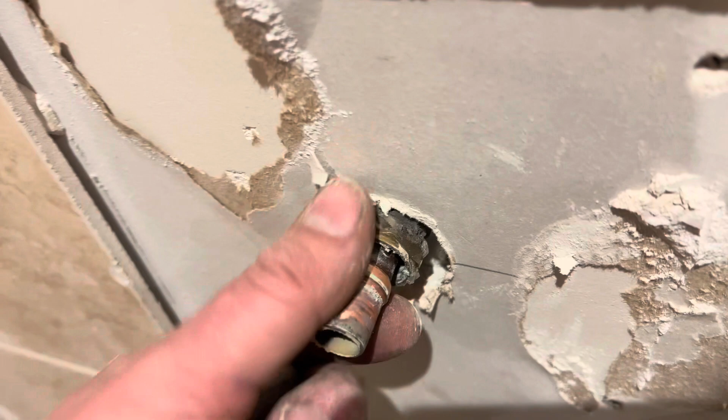So the weatherboarding is going to go on, and it's going to bring it out probably 15 mil, which means these pipe tails aren't going to be long enough. And this technique here is a nut and olive that goes onto the 3/4 thread. So what I'm going to do is, I'm going to use a very old-fashioned tool now. I'm going to cut it, remove the olive, cut it and clean it, and I'm going to use a swaging tool so I can just about get it on.

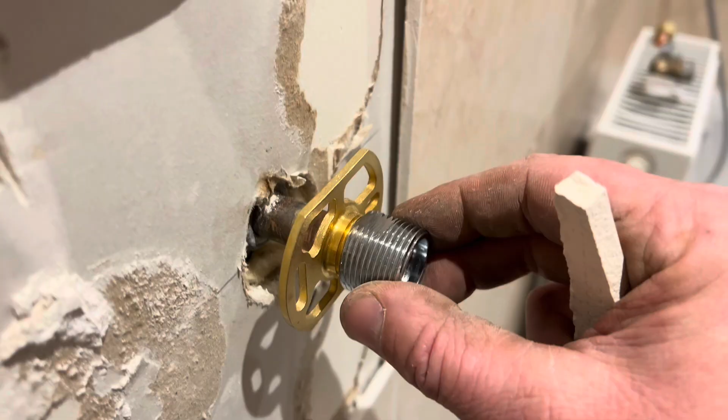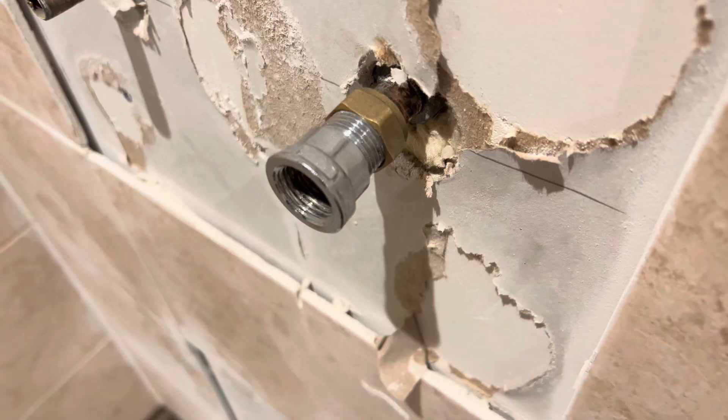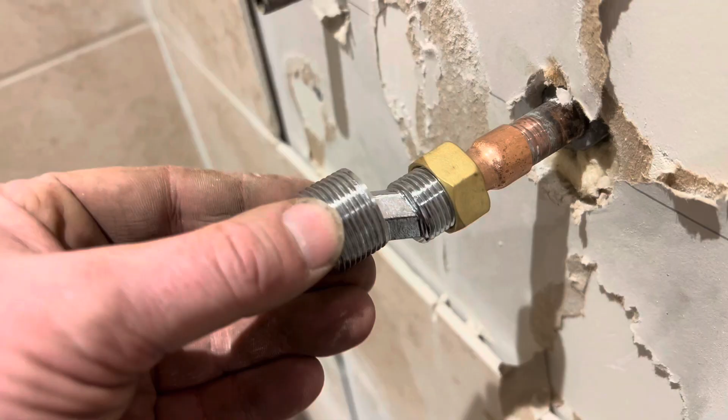The next method is this technique. Now I like these because you can screw it in the board. However, the pipe is too short. First option, male iron, make a PTFE grommet and screw that in there. That's one option. Another option, solder a tap connector on and use this type of connection technique.

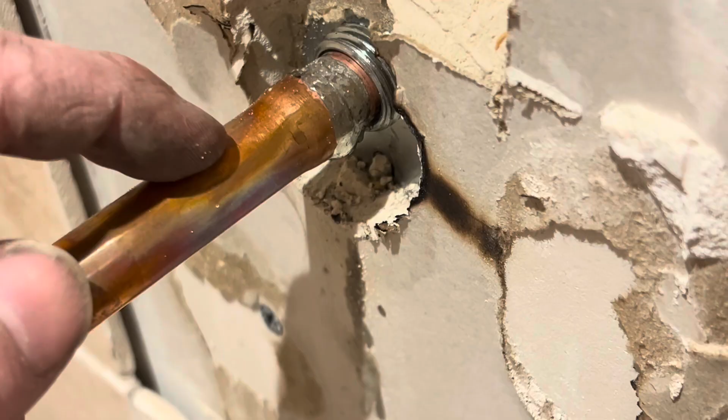So this is a swaging tool, and you use this instead of using a coupling. Here we go. There you go, one coupling. So only soldered one side. If there's an ordinary coupling, conventional coupling, you'd be out to there. So that gives us room. All up to here. Job's a good one.

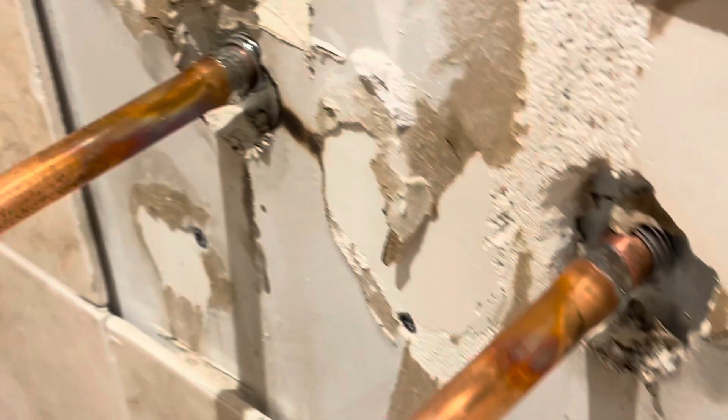So this is the state of the pipework that is behind the tiled wall. You had a mixture of Speedfit pipe, different makes, different brands, had the wrong inserts in. Some of the inserts were missing. Some of the components inside were in the wrong order, and well, that had been leaking for some time. So as a conscientious person, I decided to do the whole lot in copper, and it's delayed the job. And I've explained to the customer the reason behind my actions, and they've agreed to go forward.

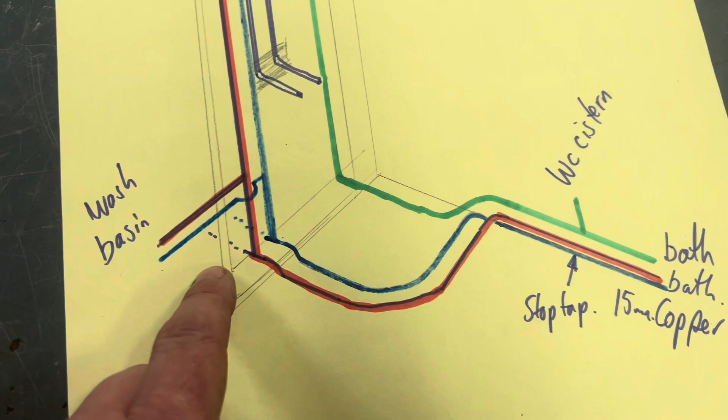Mains will come in, you'll feed next door, feed the basin, and then go to the unvented cylinder. The hot to the basin and to the bath. The shower now will have its own supply. So if the shower ever becomes faulty, it can be isolated in the loft space.

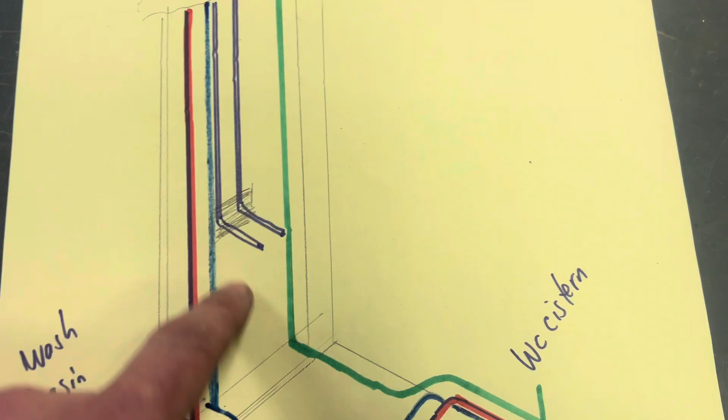The balanced cold supply, which comes from the pressure reducing valve on the unvented cylinder, will come down, feed the WC and the bath. So the reason why I've decided to keep that, if they ever have a bath shower mixer, it will work. And then the balanced cold supply will also supply the cold to the shower.

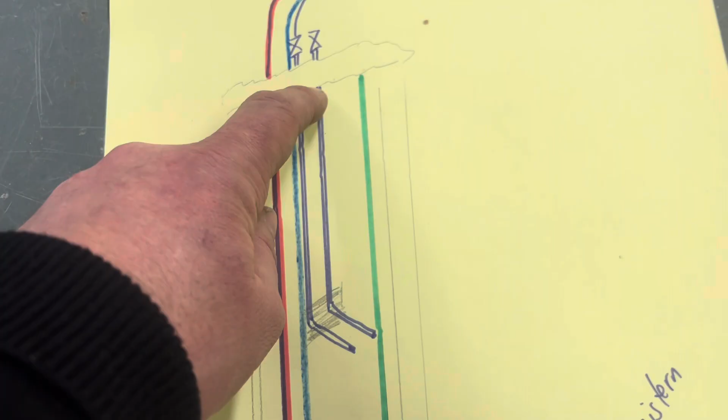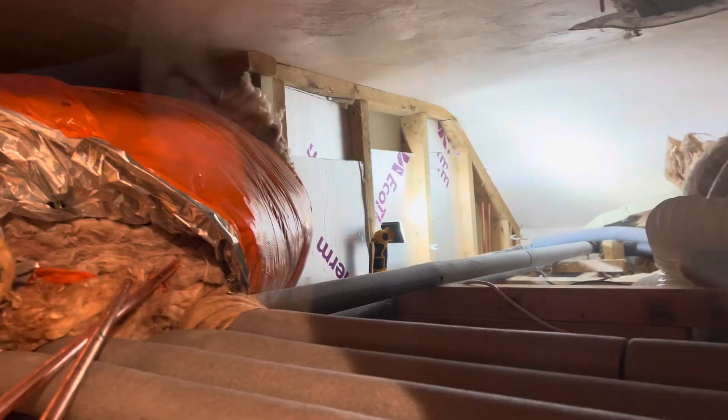The joys of being a plumber, going in a tight loft space. Right, so the pipework in the void, stud wall, was all plastic and leaking, so I've rerouted the pipework here. There you go. So it comes up, all the copper is now accessible, the shower has its own supply. So now I'm going to turn the water onto the shower. Hopefully there's no leaks. There you go. Oh God, heaven. Job done well and durable.

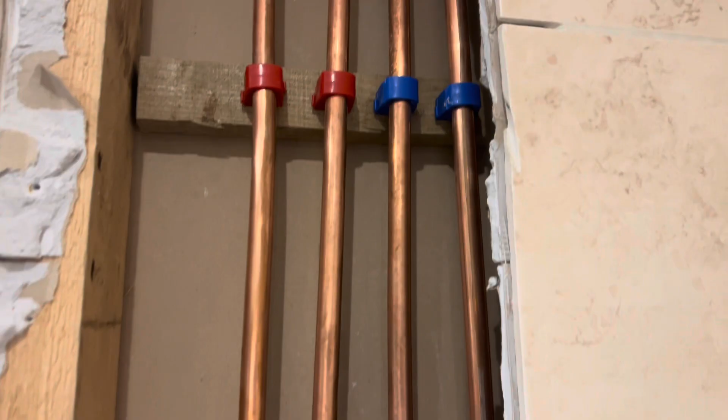So it's all been routed down. Shower's first fixed. It's on bends and it's on its own supply in the loft space, so no issues there. Nice shower plate just to hold it in place. Supply comes down. Look how neat this is.

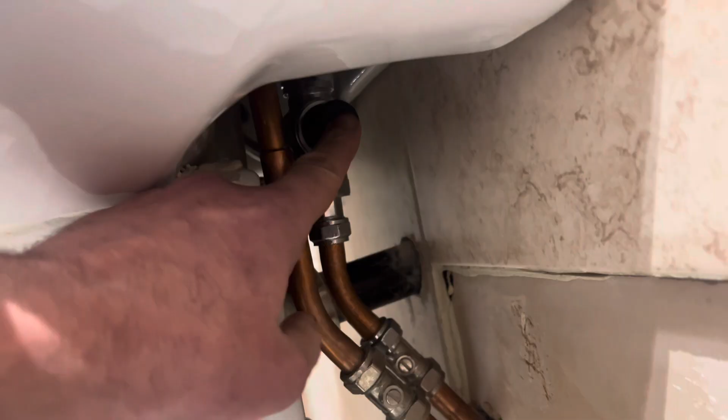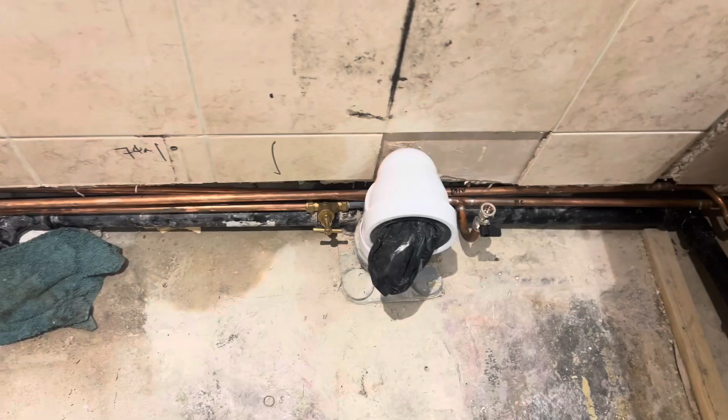Thermostatic mixing valve facing you, so you can get to it, you can adjust it. Again, it's got the single check valves on, cold water's category 1, hot water's category 2, isolation valves. Again, one on the bath, isolation valves on as well. Isolation valve for the toilet.

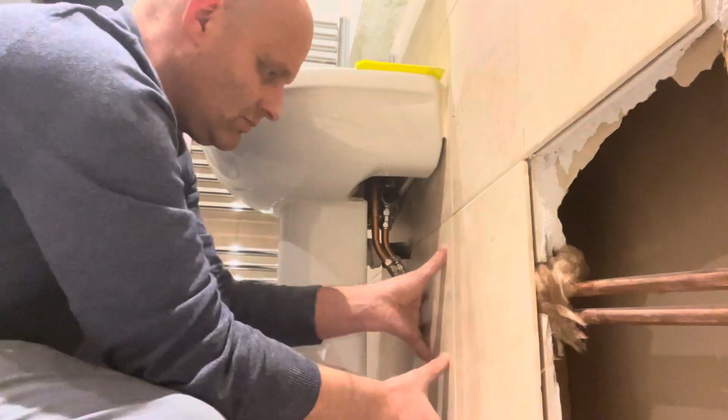So now what I'm going to do is just add some strength to this. I'm going to put some insulation there just for the noise issue, because obviously someone turns a tap while you're having a shower. I don't want the vibration or anything like that, so I'm going to insulate that. I'm going to put some wood across here so that when they have a shower, the rail, if it takes some abuse, is going to have a good wood fixing.

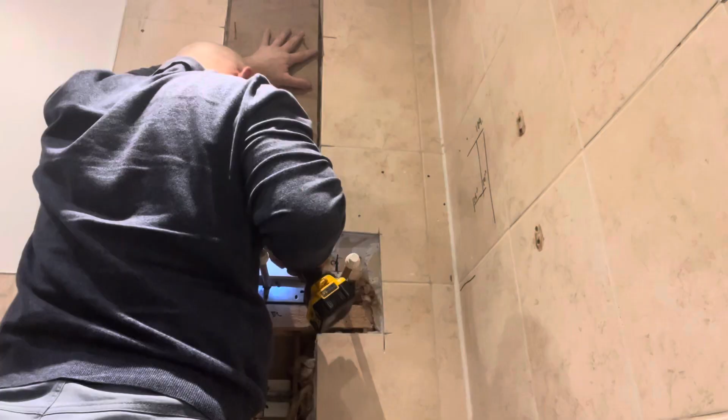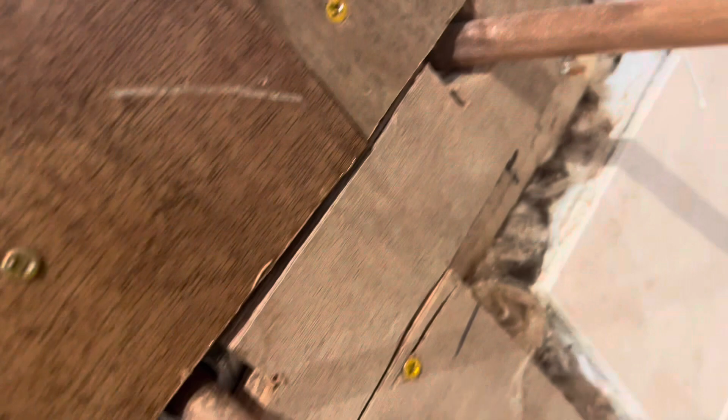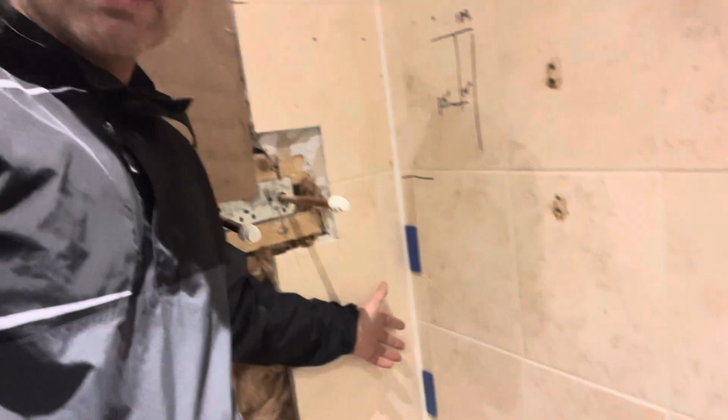Now, the wall is so far out, it bows. These are cottages probably 200 years old. So what I've done here is put some wedges in, some gap fillers, what window fitters use. When it comes to bathroom suites, they don't have the quality that was there, say, 20 years ago. So you've got to do extra actions just as a precaution, really.

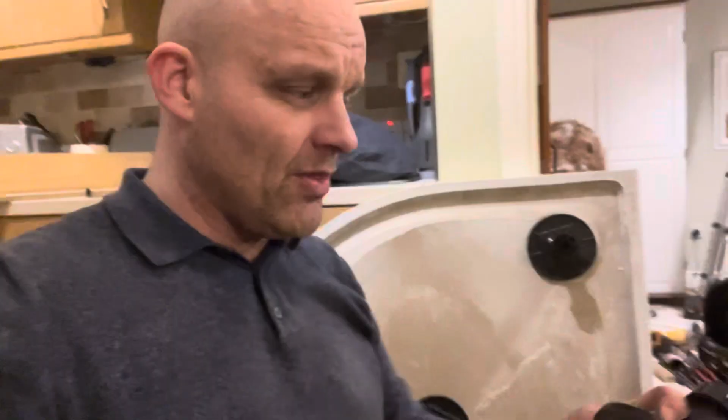So this tray is actually really good quality. It's resin, it's stone, but the feet are supposed to stick on it. So, day before, I'm going to glue the feet on.

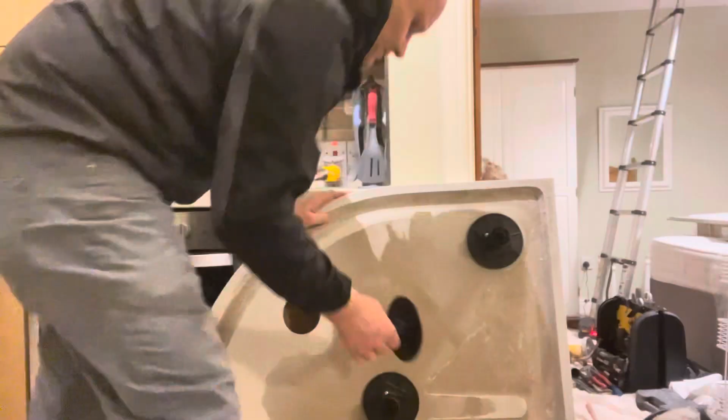The weatherboarding is cut to the correct length. Now I've got to drill the holes to first fix it through. But for durability, the lifespan of a bathroom suite should be about 15 years. I want to get a bathroom suite to last about 20, 25 years. And this is a perfect bathroom suite. If you look, the walls are half painted, so you can spice it up after a while.

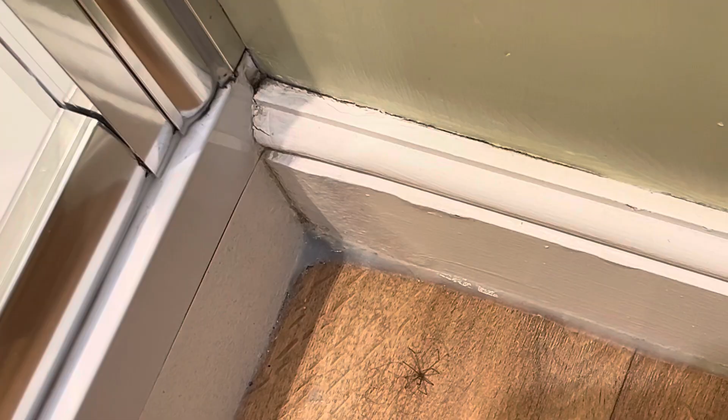For the weatherboarding, I'm going to go past the tray, so if the screen ever leaks, it won't destroy the tiles or the architrave or the skirting. And I'm going to show you an example now in the ensuite next door. So this shower surround, the screen and the weatherboarding is a perfect job. Very neat finish, very, very professional. But if you look here, they fitted the weatherboarding to the edge of the tray and it's leaked. It's got damp, and look at the skirting, it's rotting.

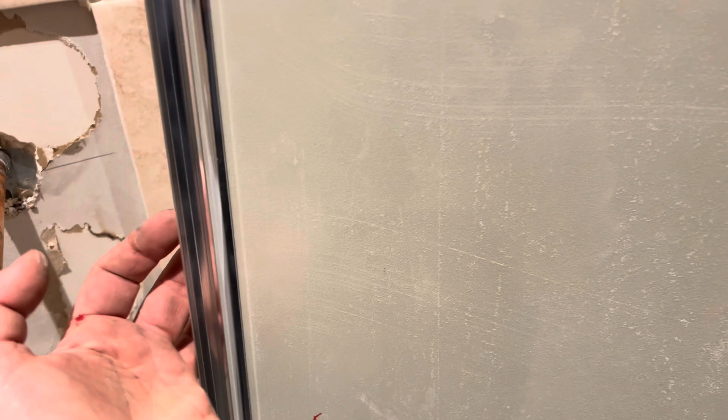So, I've marked it out from the edge of here, which represents the wall, from ceiling down. I'm going to do 2 pilot holes before I do the main holes.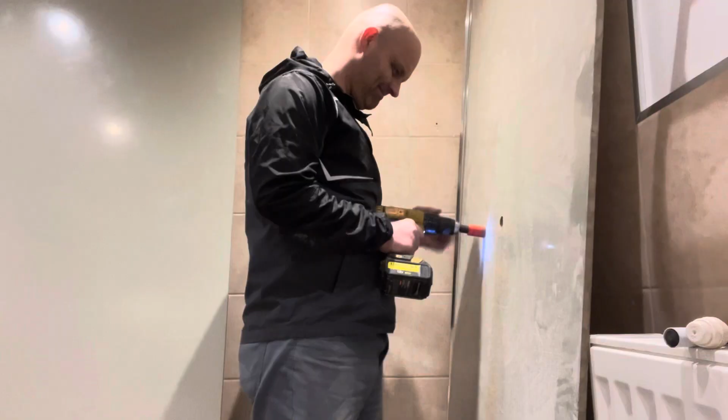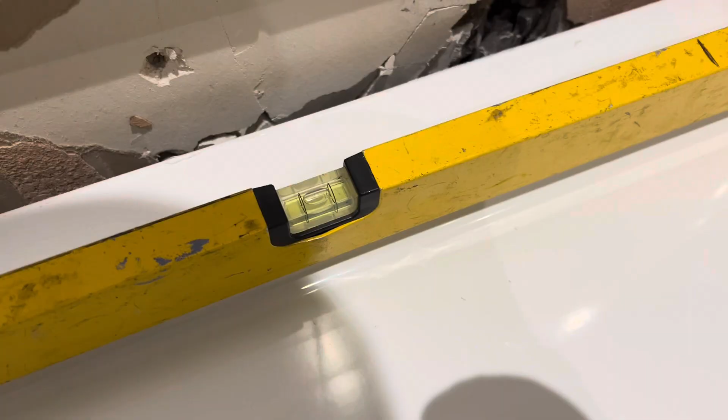Fingers crossed there's no issues here. Spot on level. Spot on level. So this method of doing the boards isn't the right way because it's more time consuming, but with my anxiety, and when you consider the fact that if I made a mess of this board, it's profit gone, isn't it? And not good for my blood pressure. So this is the method that I use.

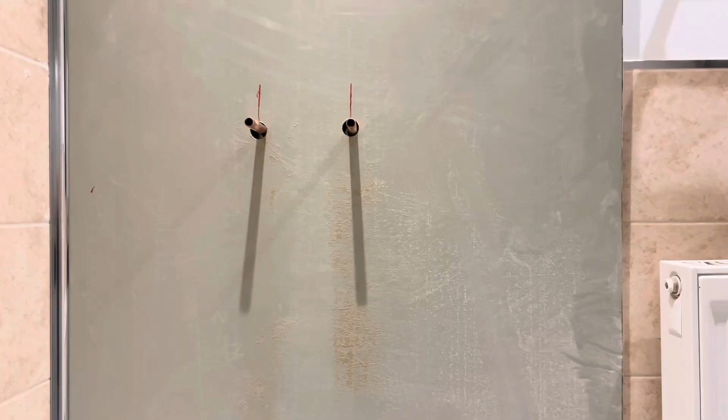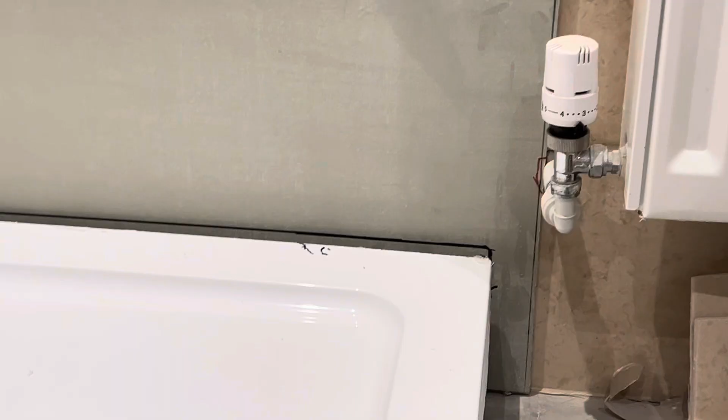The board's in, first fixed, the tray's in at the correct level, but now what I do is I mark it out along the side as well. So I'm going to pull the tray out, mitre it, push the tray back.

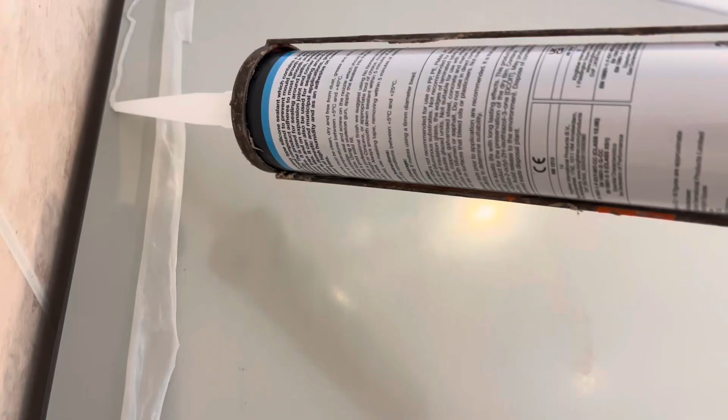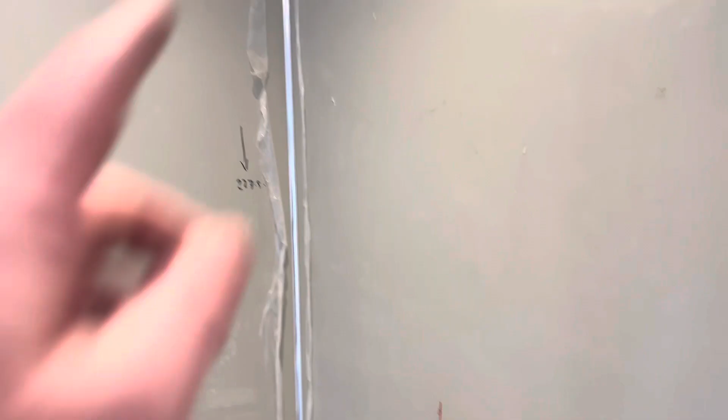It goes past the old tiles, the strip's siliconed in. That's level, glued. Goes down past there, look.

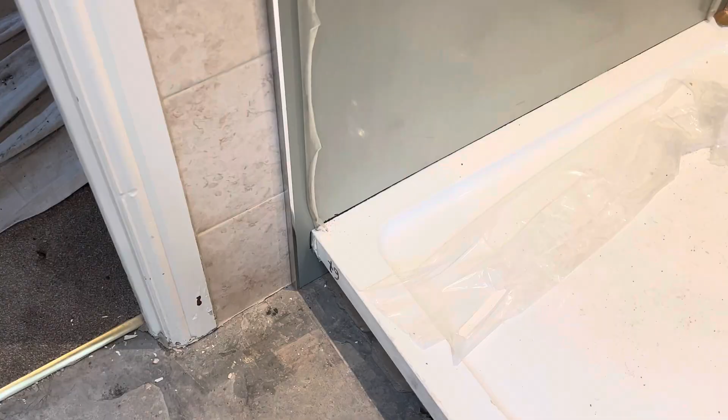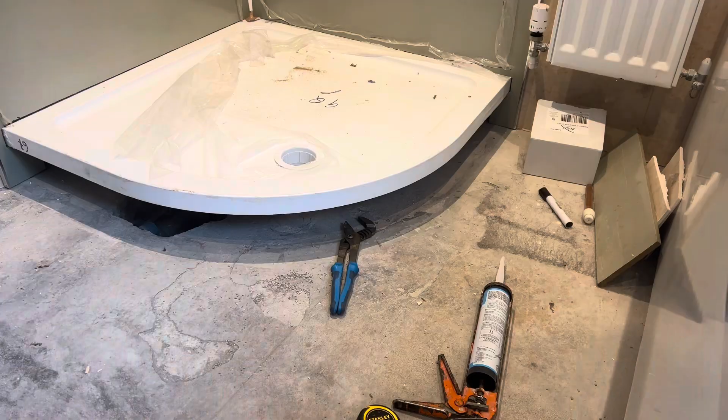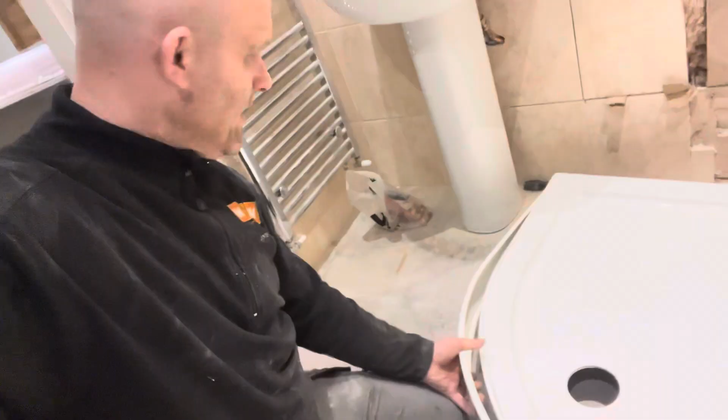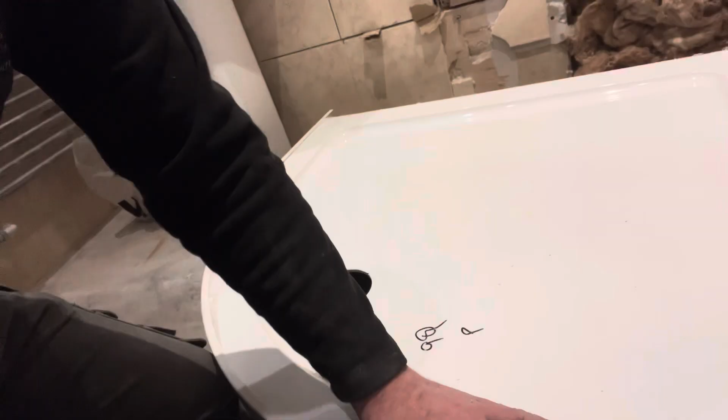So a simple tip now, how to do the plinth for the shower tray. Get the plinth, put it on the tray, out of position, like so. So that's where the tray plinth will be. Mark it off there and there. Dead simple, isn't it?

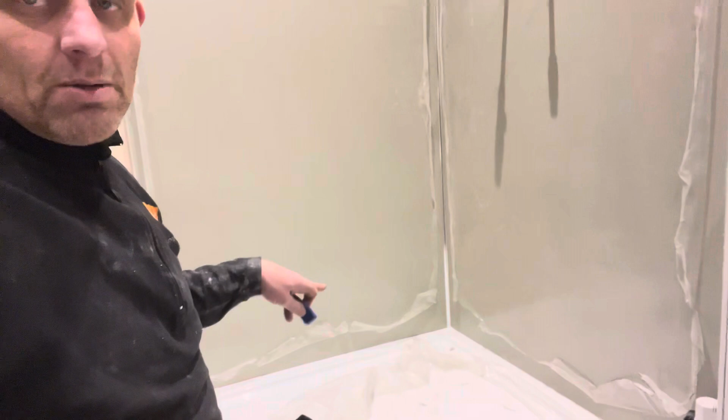So I'm now going to put silicone between the wetwall boarding and the tray. I'm going to let it dry, and then I'm going to fit the shower screen and the shower panels going up, channel going up. And I use this. This is really good. It's just for spreading silicone, and it just keeps it clean and neat. And as you're actually using this, it actually pushes it into the sealing zone. So here we go.

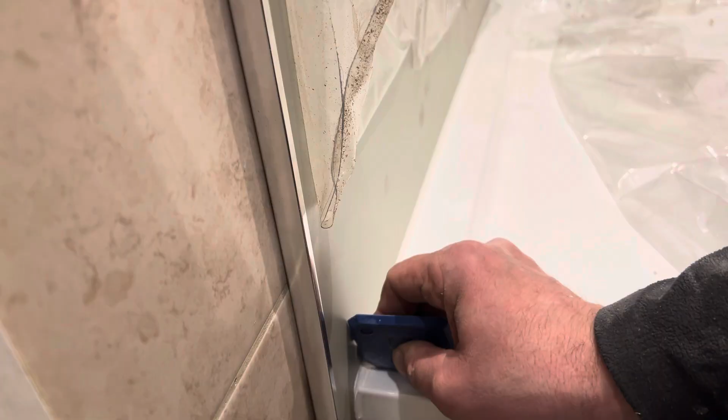So now I'm going to start fitting the actual shower screen. I've done that for easy access. Happy with that. Now the shower screen. So for the shower screen assembly, there's a method to doing these. Everything's in line. All the components and spares are ready. I've got the instructions.

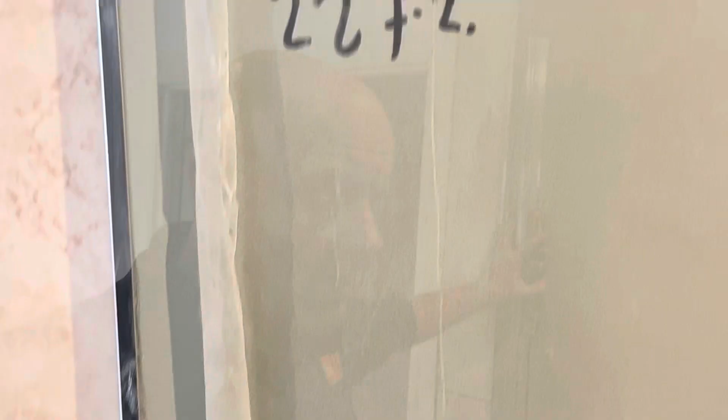So first thing, mark a centimetre from the edge and draw the channel line. So most DIYers and plumbers make the error by gluing and siliconing the shower channel to the wall. You don't do that. You do not do that. If you do that, you'll never get it out for maintenance purposes.

The caretaker, the manager of this hotel, if there's a problem here, he's got to take this shower panel out quickly while the residents go out for lunch or go hiking. So you don't glue them back, you don't silicone them back. Another point is, the seal goes on the outside. Goes there, up the wall. If water gets in this channel, it will leak.

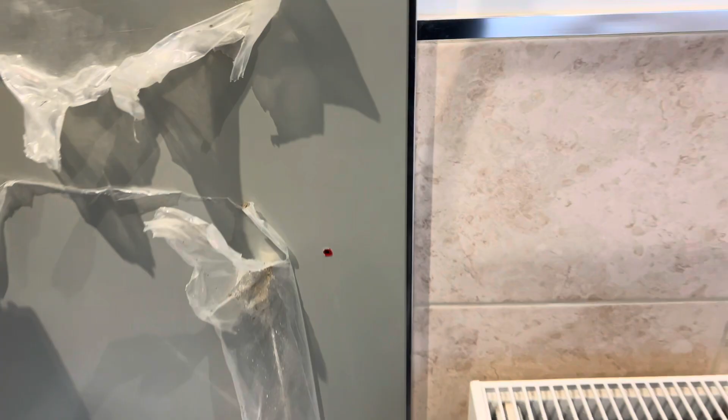So next few hints, always have wipes when you're applying silicone. It's really good. Whenever you're drilling through tiles, take the hammer off, or use a proper masonry drill bit. So what I'm going to do here is silicone around the hole just to make it watertight. Never use your drill driver on them. These can be quite complicated. Make sure you always put the seals in the right place. It's all done.

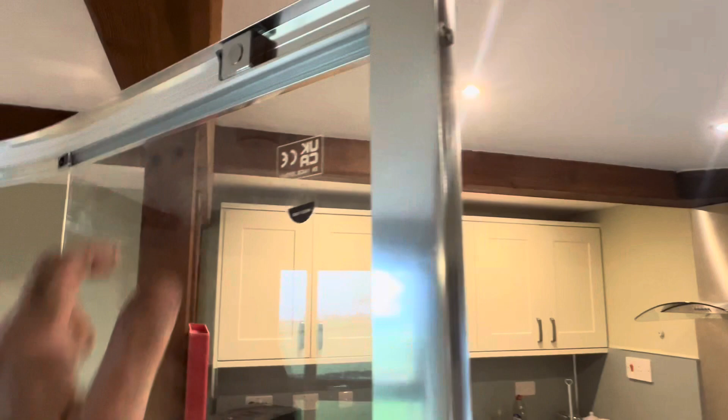Don't bother sealing this side of the screen, and don't bother sealing here. If you seal there, it'll get damp. So you just seal the outside of the channel and outside around the shower screen. You do that so if any water gets inside the shower screen, the channels or the screen, it can drain out.

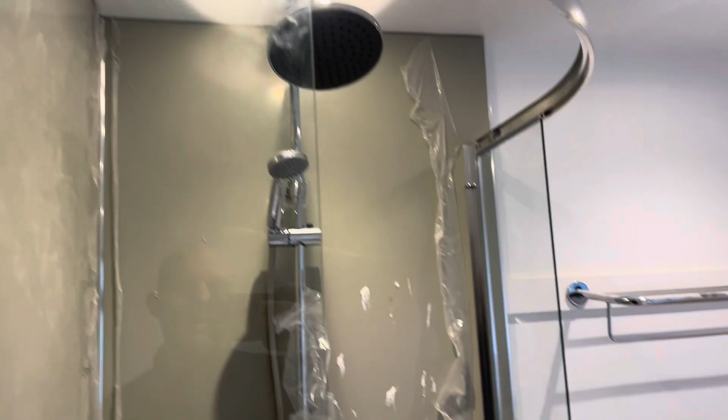Shower screen's in! You might need assistance with these screens because it is heavy.

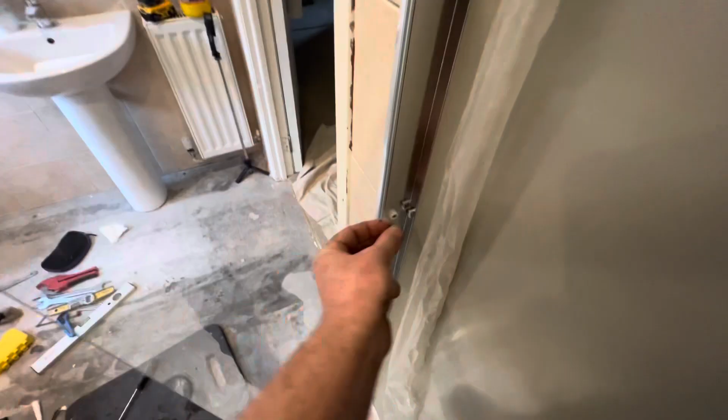The wheel release goes at the bottom.

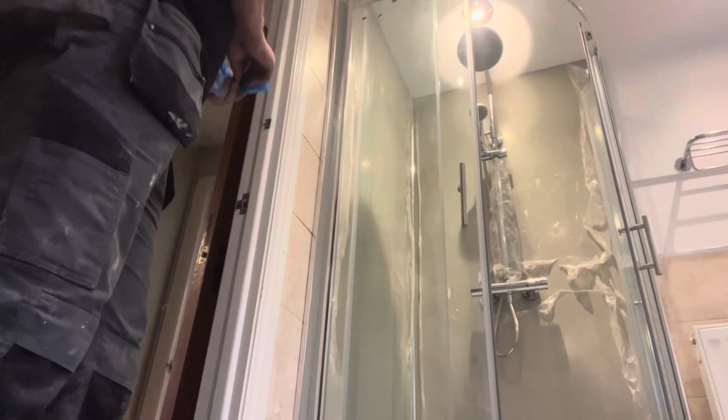So just to finish on another tip, after you've installed this, there might be a little bit of movement, you know, silicone might shrink, or if you rested it on wood and cement, that could dry and shrink. And the frames can sometimes move, and the doors are quite heavy. So the trick for these to stay closing properly is to adjust the door hinges.

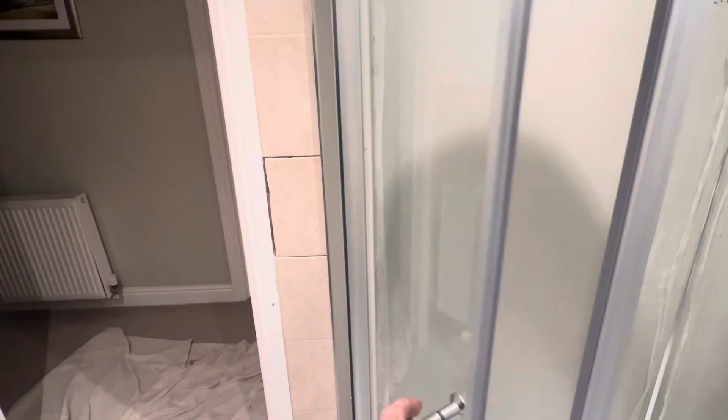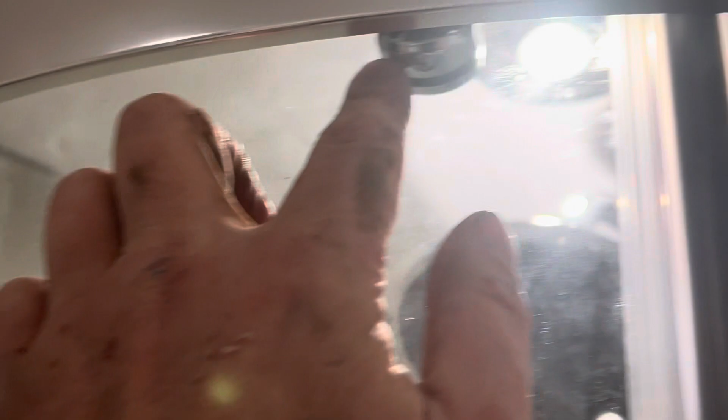So you close the door. On the hinge, there's always this screw. That will adjust the door for you.

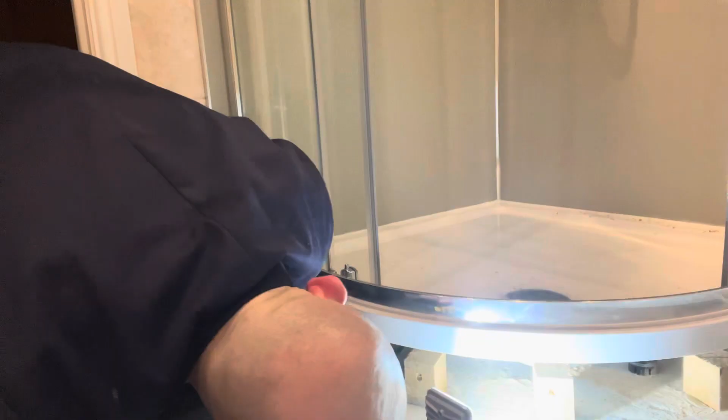I'm singing in the rain, singing in the rain, what a glory.

Something completely different now, so he's bought 2 toilets to install, and this is what he's done, very wise. These are the components that came with the toilet. Look how cheap that is, cheap plastic thread, and the siphon is really poor quality. So this is the wise decision he's made.

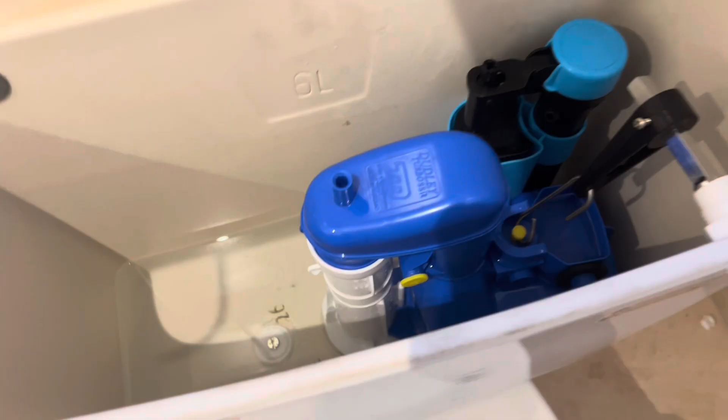So this siphon we've installed can be serviceable. Take the pin out, you can change the washer inside, service it without dismantling the toilet and the cistern. Bravo. And he's supplied a proper good ball valve. Look at the quality of that. But another reason why that ball valve is good, look at this. Got a brass tail, can't cross thread that, and an isolation valve.